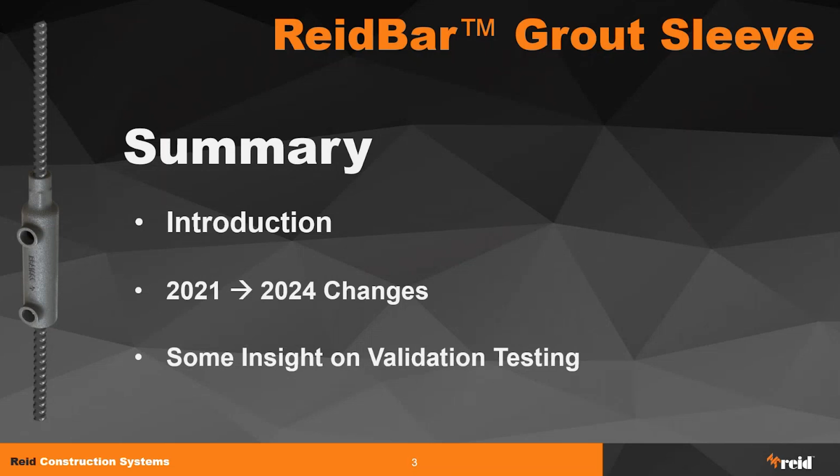First of all, what are ReidBar Grout Sleeves? ReidBar Grout Sleeves, of course, is a full strength splicing solution. It's used to connect precast panels to panels, and also precast panels to foundation slabs. And it allows for the continuity of the reinforcement, and it's a fully tested proprietary construction system for structural connections, and it's certified with a CodeMark for the compliance with the building code.

How does that work? There is a ReidBar, which is a 500E grade bar, which is connected in the neck portion of the grout sleeve, and the connection is a threaded connection with a coarse thread, which is the ReidBar thread, and the other bar goes inside the sleeve and it's connected with grouting.

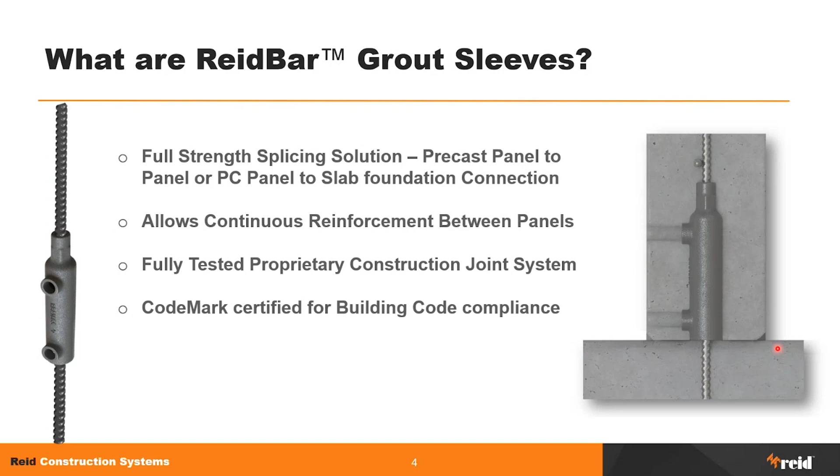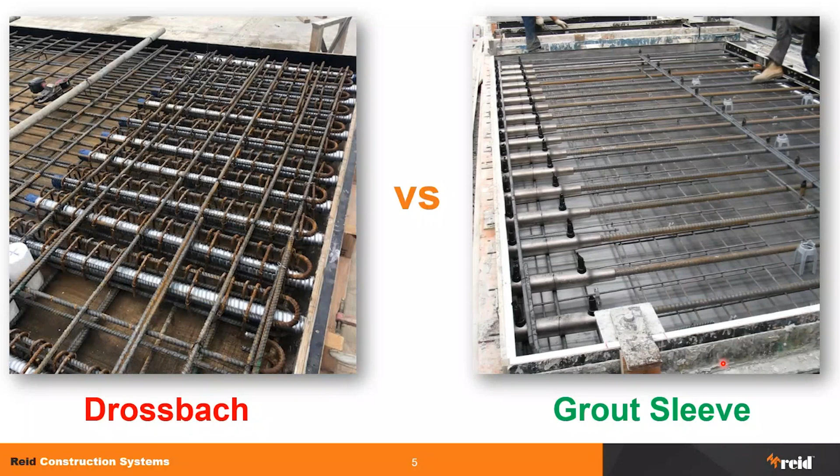So now let's move on to the next slide. So for these kind of connections in New Zealand, the two main solutions are the Drossbach and the grout sleeve to connect these panel to panel connections vertically. And although they do a similar job, that's not exactly the same job. So for the Drossbach, we are talking more like a lap splice, in particular a non-contact lap splice. For ReidBar, we can handle that as a mechanical connection, so it's like a mechanical coupler.

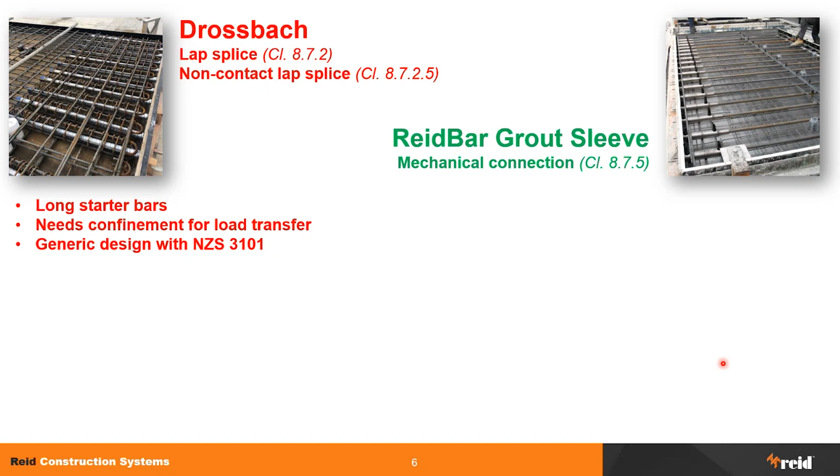For Drossbach, of course, you have long starter bars that are required for the development length, and there is a requirement for confinement to be able to have a load transfer, however the design falls within the scope of 3101, just like a lap splice.

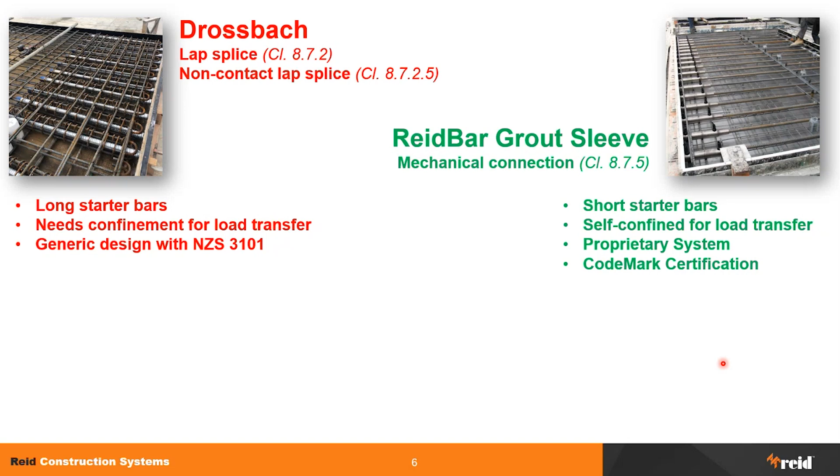For ReidBar Grout Sleeve, we have much shorter starter bars, and the system is self-confined for the load transfer. It's tested like a coupler in free air, so it doesn't need the concrete to transfer the load between the two bars. Although confinement is still a good thing to prevent spalling and cracking, the load transfer is ensured regardless. And it's a proprietary system, covered by CodeMark certification, as we mentioned before.

So for the Drossbach, if we look at 3101, when we have these kind of connections, it shall be avoided if possible in ductile regions of the panels. And if it's not possible to avoid, it needs to be staggered.

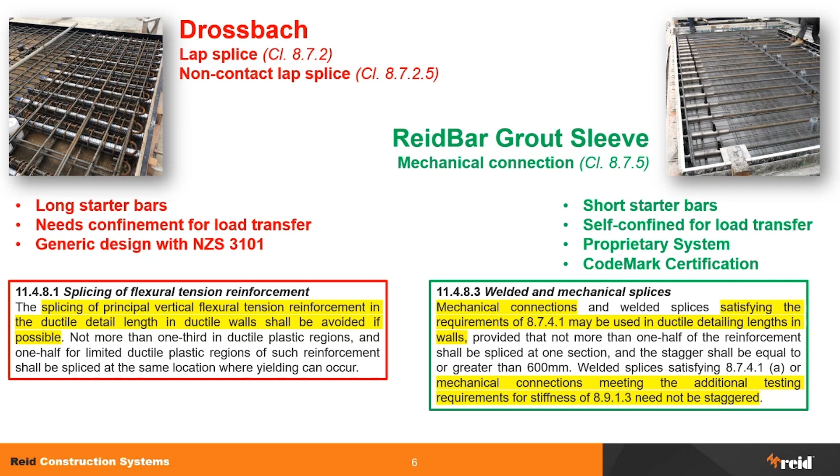For the grout sleeve, on the other hand, because it's tested as a mechanical splice, and in particular also tested to the clause point 8.9.1.3, which is referencing ISO 15835, the low cycle fatigue test, because it's tested against those requirements, it can be used also in a ductile region of a panel without the need for staggering.

Now, for the compliance with the building code, for the Drossbach, because it falls within the scope of 3101, it follows the path of the acceptable solutions verification methods.

For the grout sleeve system, because of the change that happened in 2017 in 3101, and then when it was cited in 2018 by the amendment of the building code, what happened is that the cast iron fittings are not anymore within the scope of 3101. Therefore, we had to go through this pathway of the CodeMark to be able to comply with the New Zealand building code through an alternative solution.

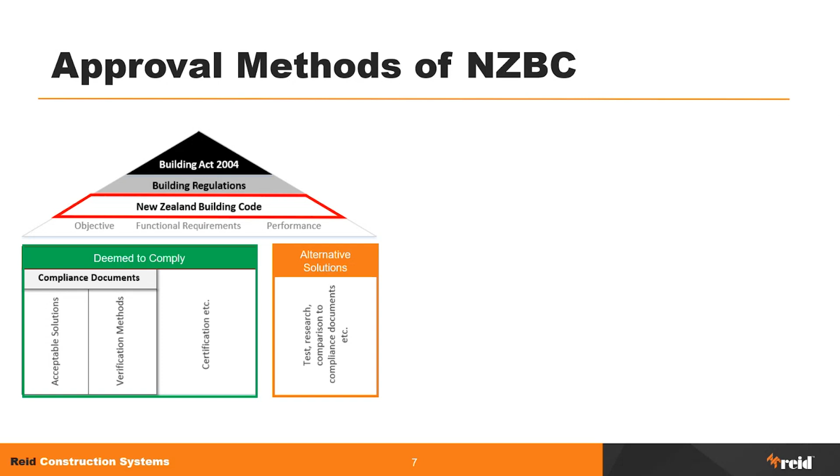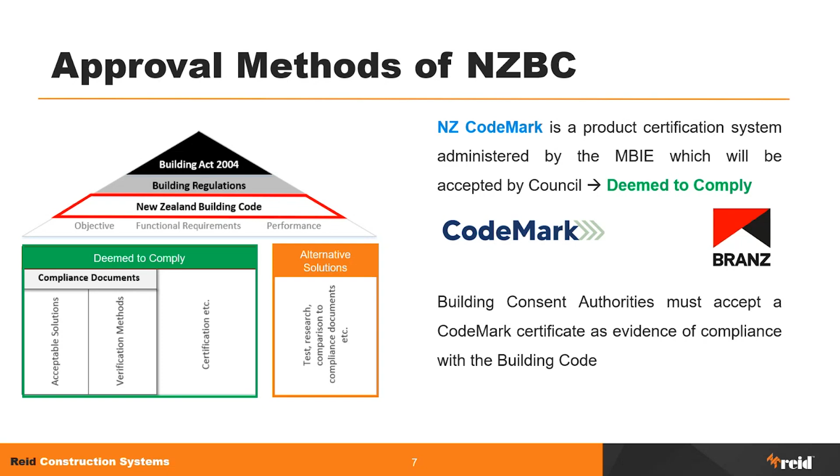But because this is a certified system, it has the advantage of being already checked by the certification body, which is BRANZ, and therefore the building consent authorities must accept the CodeMark certificate as evidence of compliance with the building code, considering that everything has been followed, because it's a strict regime.

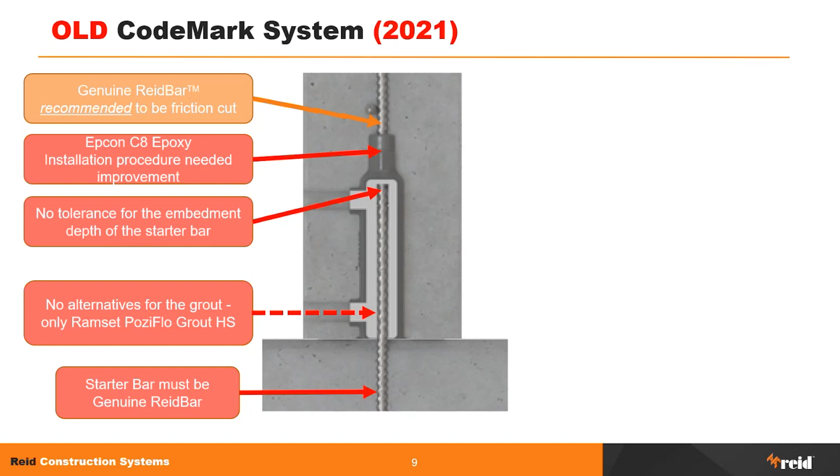So let's look at the changes that happened since 2021. All these changes are the outcome of us listening to the feedback that we received from multiple sources, from SESOC and specifying engineers, from the contractors, precasters, and also from the independent laboratory that has been testing the system. We listened to the feedback, and the outcome of these feedbacks are the changes we have implemented. Here we have a quick overview of all the changes, and then we'll deal with this in more detail.

So the first change is that now the ReidBar that is screwed inside the female thread of the grout sleeve must be friction cut to guarantee full thread engagement. The procedure to install this bar inside the thread now has an easier procedure for the installation with Epcon C8. We use Epcon C8, which is an epoxy, as a thread filler, and the procedure has been improved and simplified.

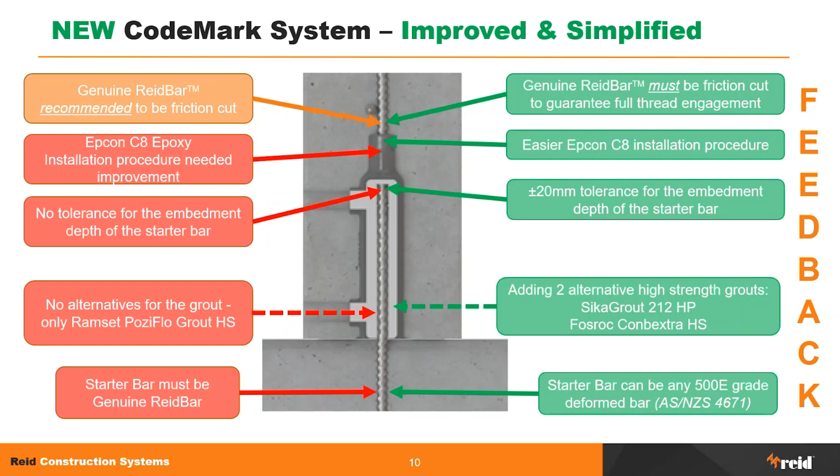Now we have introduced a tolerance range for the embedment depth of the bar inside the sleeve, plus minus 20 mil of tolerance for the starter bar. And alongside PoziFlo, which is still there, we have introduced two more grouts, one from Sika and another one from Fosroc. Lastly, the starter bar that goes inside the sleeve and is grouted can now be any 500E grade deformed bar. It doesn't need to be ReidBar as it used to be, but of course it needs to comply with AS/NZS 4671.

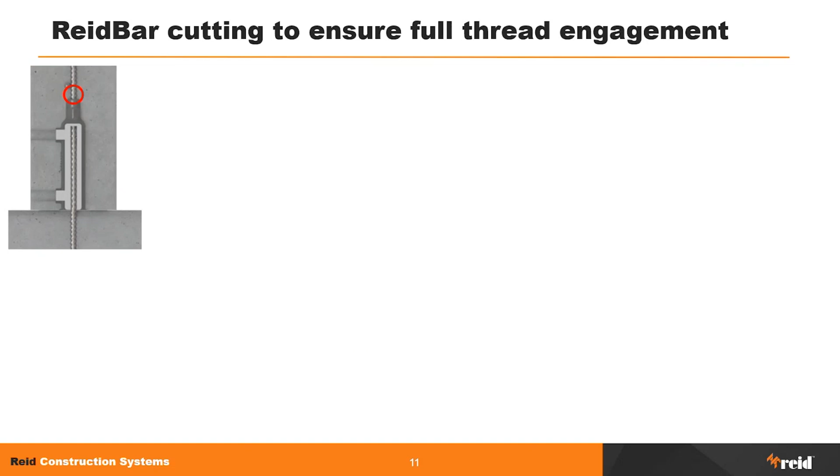So let's start with the first one, the cutting of the ReidBar that is screwed inside the neck. As I mentioned before, here also we'll mention the feedback we received, both coming from the independent laboratory, in this case Holmes Solutions, that was testing the system. They had some instances where they received the bar crop cut and installed it that way, and in some instances there wasn't a full thread engagement, resulting in thread stripping because it wasn't fully screwed inside the female thread.

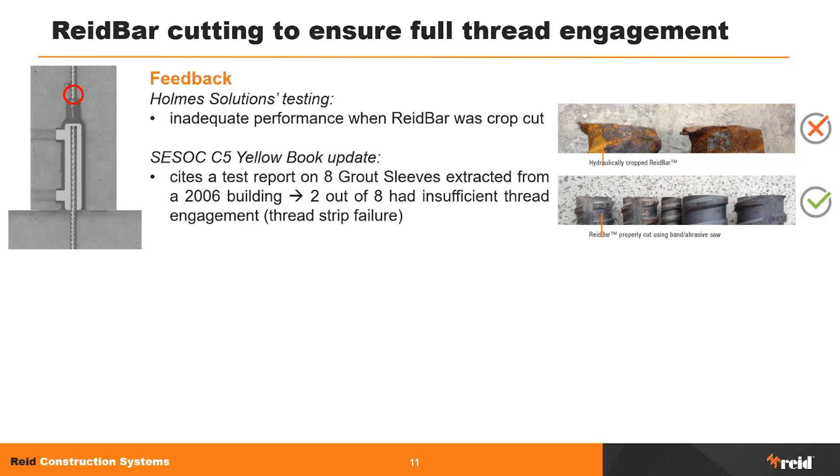Also from the SESOC C5 Yellow Book update, the update cites a report where 8 grout sleeves were extracted from an existing building designed in 2006, and 2 out of these 8 grout sleeves had insufficient thread engagement. We link this issue to what happens when the bar is hydraulically cut, cropped. There is a little kink, so the bar is slightly bent at the end, and therefore when the bar is screwed inside the female thread, it gets jammed. There is not full thread engagement.

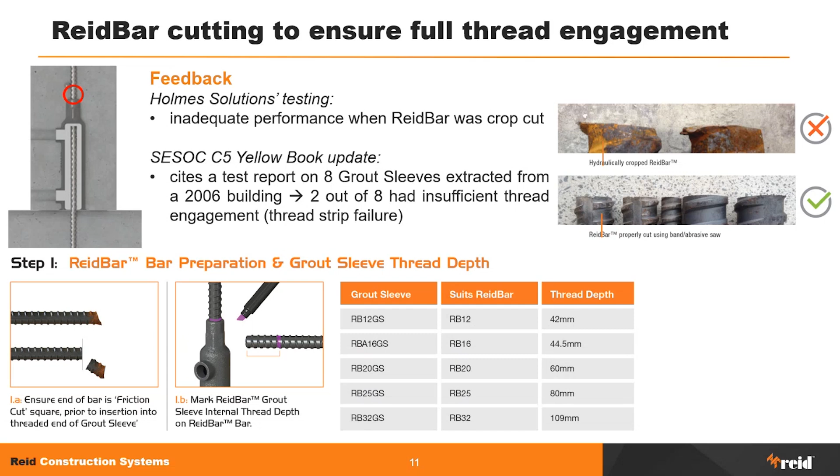So now with this new procedure, which we used to recommend as a practice, it is now actually mandatory to comply with the CodeMark. We need to cut the last bit of the bar - we're talking about a very short length, like 10 mil, not very long, but it needs to be taken off to prevent this issue. And then, as before, we need to mark the thread depth on the bar so there is a double check on the actual full thread engagement in the system.

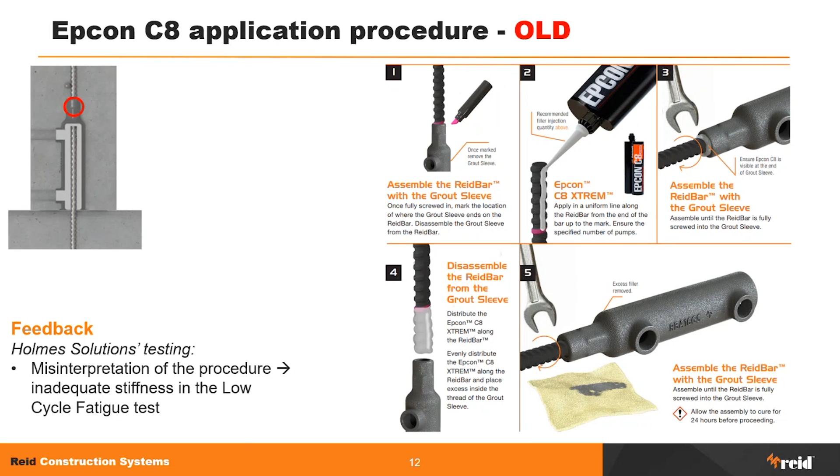Now we move on to the application of EPCON C8. Again, the feedback in this case was from the laboratory, and the procedure we had wasn't too user-friendly and might have been prone to misinterpretation, therefore ending with not enough epoxy filling the thread. Therefore, we studied a new application procedure, which is much easier.

So we kept the same number of trigger pumps, so the quantity of epoxy is still the same, but the procedure is that we put half of the quantity on the bar in the area that will be marked for the threading, and half inside the female thread on the grout sleeve. The bar is then screwed inside and tightened with a spanner, and that's all. So it's a bit cleaner and easier.

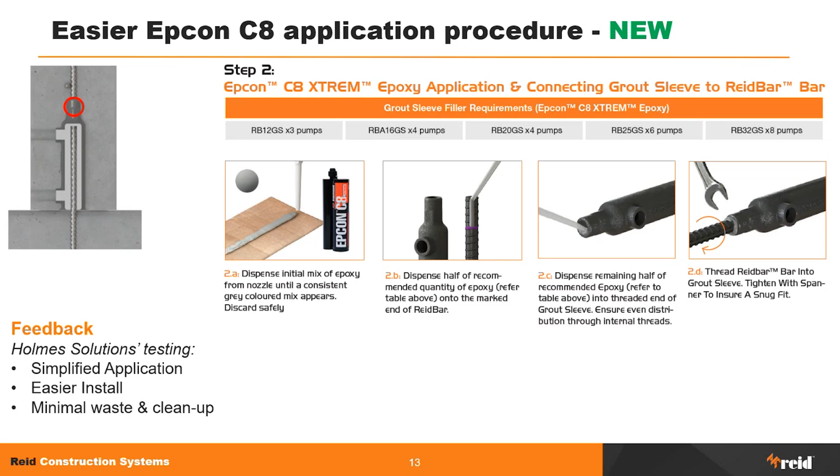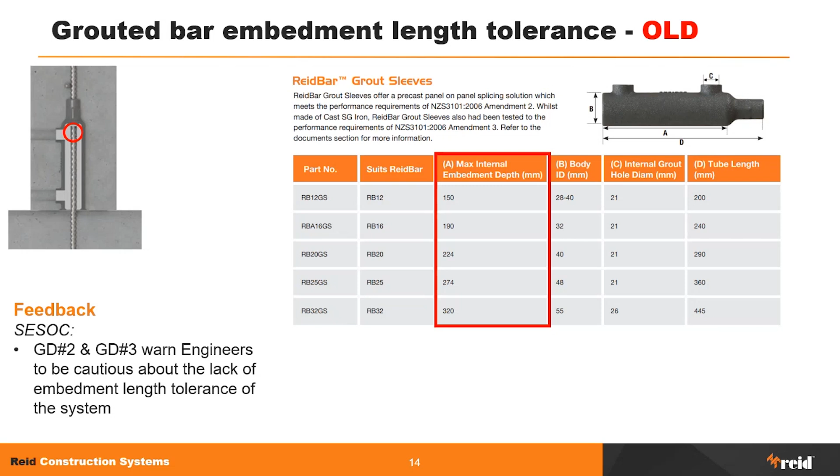Now we move on to the embedment depth. We had feedback from SESOC, in particular from the task group analyzing the grouted connections. They warned engineers that there was a lack of embedment length tolerance in the system, which was fair enough. Therefore, we have introduced a plus minus 20 mil tolerance for that, which will also be compliant with 3109.

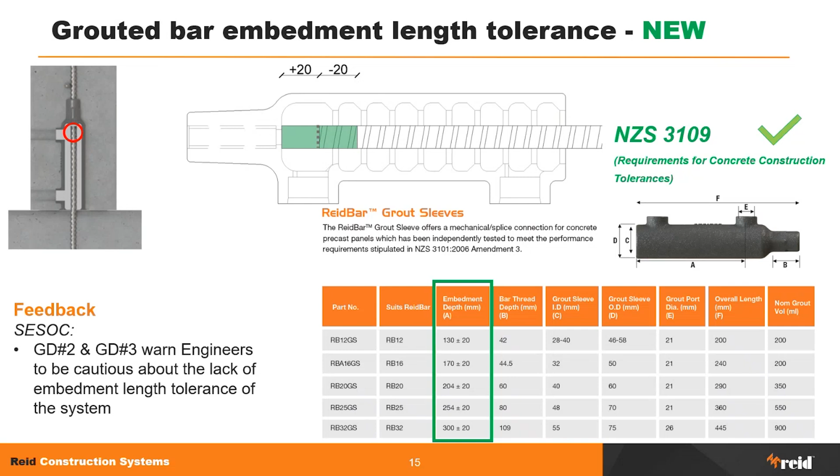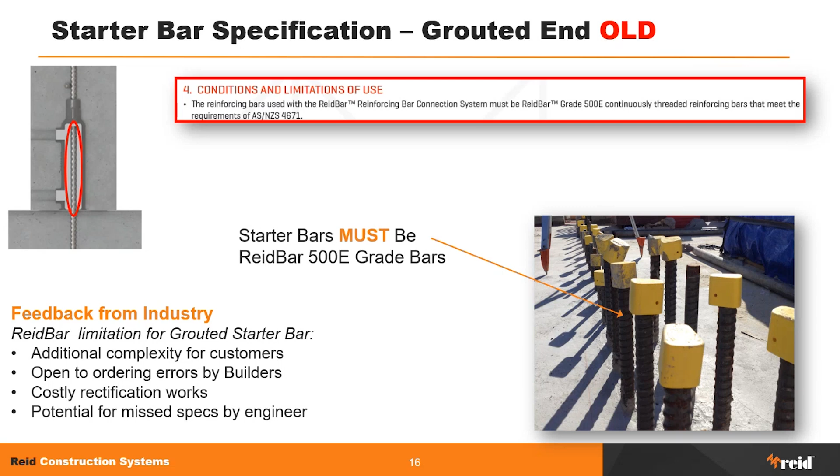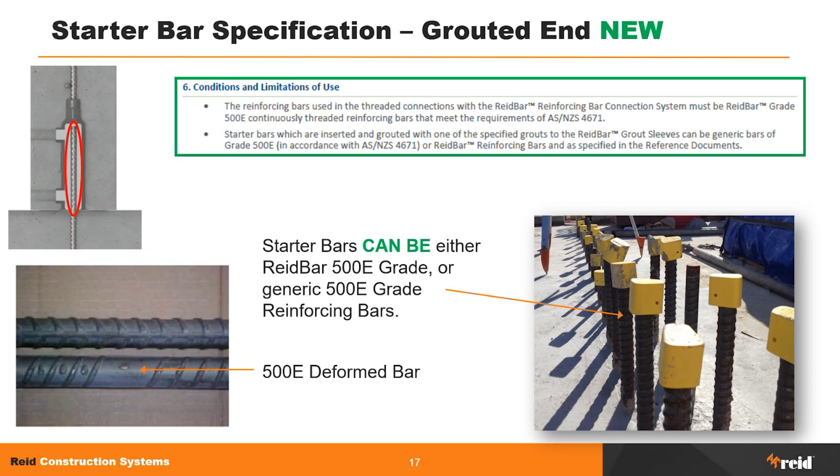We move on to the starter bars. We received feedback from contractors because sometimes the bars on site were not actually ReidBar, they were generic 500E grade bars. This issue particularly happens at the foundation, and it would be very expensive and time-consuming to substitute these bars with post-install ReidBars to comply with the CodeMark requirements, which is a prescriptive environment. So we decided to make the system more versatile, giving the possibility of using any 500E grade deformed bar, not just ReidBar, as a starter bar inside the sleeve.

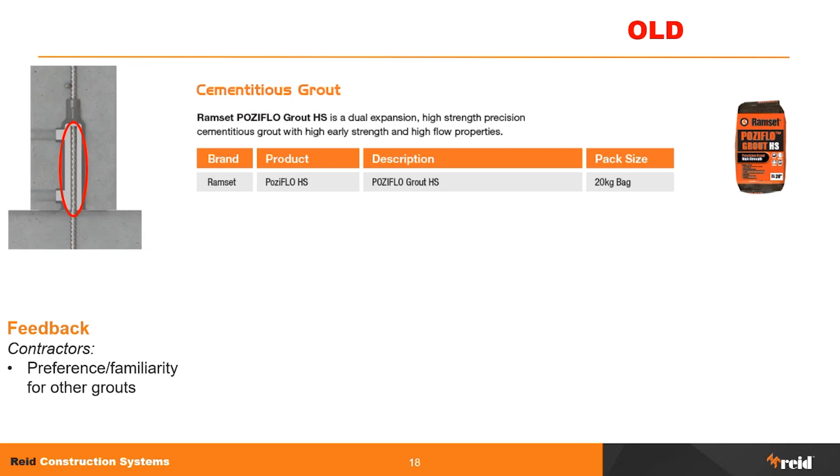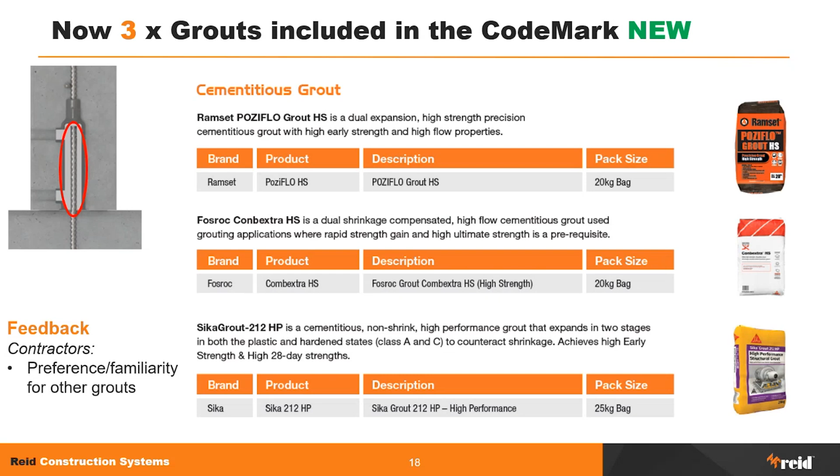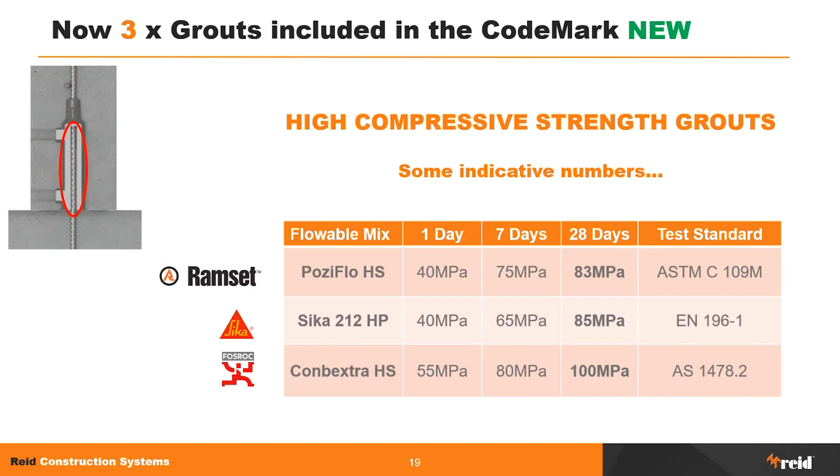We move on to the grouts. The feedback was coming from grouting contractors, some of whom have preference or familiarity with other grouts. So alongside PoziFlo Grout HS, we decided to introduce two more grouts from two popular providers, Fosroc and Sika. We now also have Fosroc Conbextra HS and Sika Grout 212 HP. What these grouts have in common is that they are high-strength grouts. It's difficult to compare apples with apples because we all tested with different standards, but we are in the ballpark of more than 80 megapascal for compressive strength.

Now I'd like to give you some insight on the validation testing and what we considered together with Holmes Solutions and BRANZ to validate the system and test for these changes. If we look, for example, at the 32 mil grout sleeve, we've introduced this new tolerance range for the embedment depth. Now the embedment depth is 300 plus minus 20. Therefore, for the test samples, we ensured the embedment depth was set to 280.

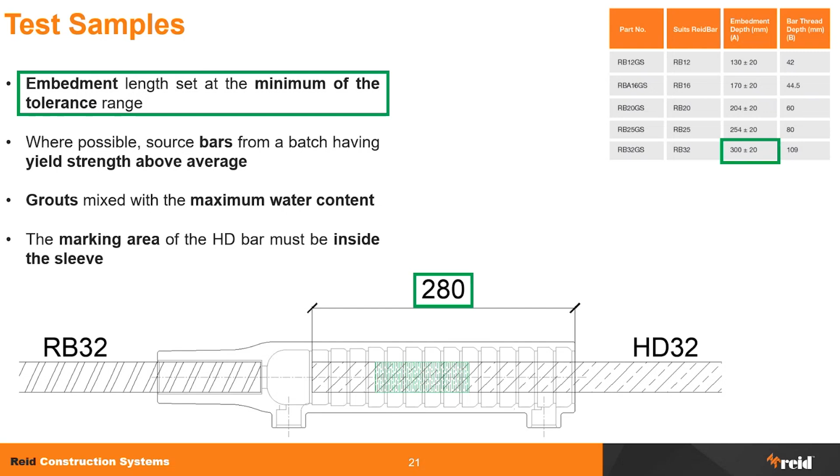Then we looked at the batches of bars we sourced. The idea was to try to get stronger bars than average, something we were inspired to do by ISO 15698, which does a similar thing. So if long-term quality data from the bar was available, we checked that the yield strength was above the mean for the long-term quality, or if not available, above 550 megapascal, which is in the middle of the range of the 500E grade bar, between 500 and 600.

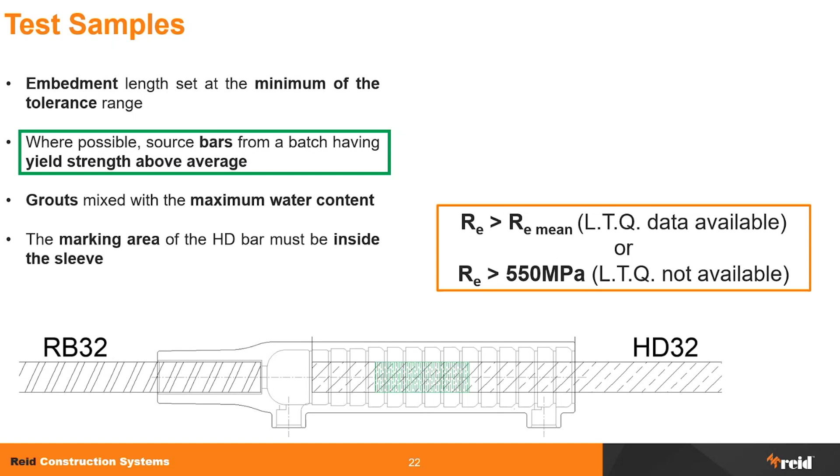Then we move on to the grouts. With these three grouts, we gave a tolerance range for the water content for mixing, and we ensured that we mixed the grout with a maximum water content within that range. I'd also like to point out that in one case we actually exceeded the water content specified by the manufacturer, which in this case was Sika.

This came with feedback from the testing laboratory, because what we asked for was not just to test the strength of the grout but also its flowability. We wanted to ensure it was easy to install and grout. The feedback was that when the Sika 212 HP was mixed with 3.5 liters, it wasn't as flowable as the other two grouts. The consideration was that if that happens on site, people might add more water. So we agreed to increase the water content to 4 liters and test it that way. The test was successful, which is why you'll find a higher water content here.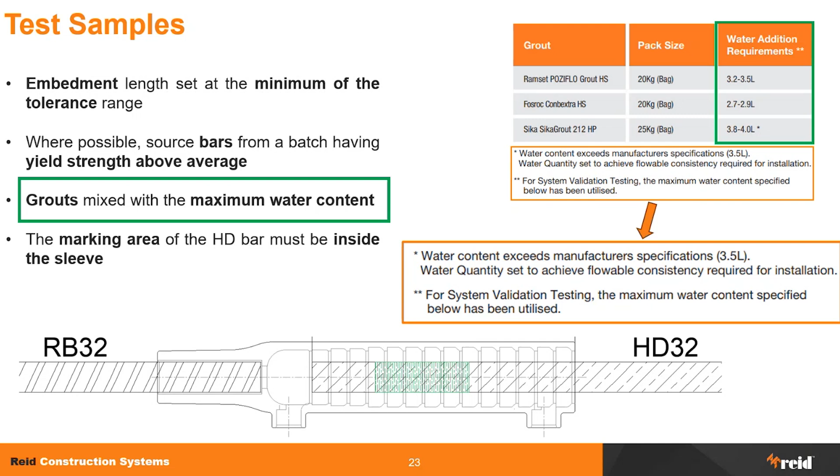Then we move on to the marking area. When discussing with BRANZ including other 500E grade deformed bars in the system, the initial pushback was that the deformations of ReidBar are more prominent compared to the deformations of other bars, specifically what's called the specific projected rib area. So we looked at other bars in the market to see what their specific projected rib area was, and it was pretty similar across them, actually a little less than ReidBar. We also noticed that for bars manufactured by Pacific Steel, coincidentally the same manufacturer as ReidBar, the marking of the 500 grade bars is missing a couple of ribs in that area.

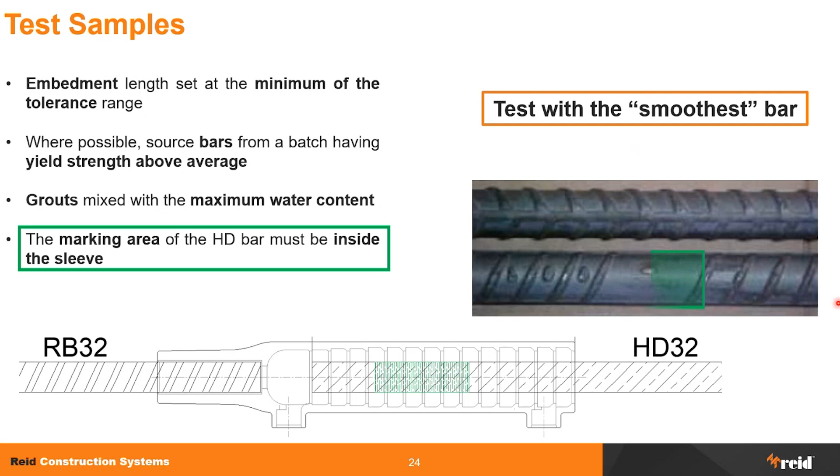So what we did was agree to test this, the smoothest portion of the bar, inside the sleeve. So we included this area inside the sleeve.

With all these, we ensured that we were testing the worst case scenario for the elongation at 0.7 FY for the low cycle fatigue, and also to demonstrate the mode of failure of the mechanical splice, where we want to achieve the ductile failure of the bar, clear of the coupler.

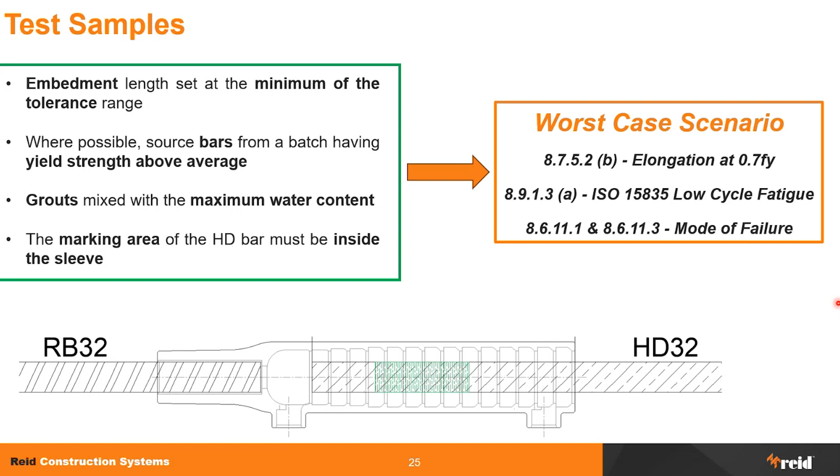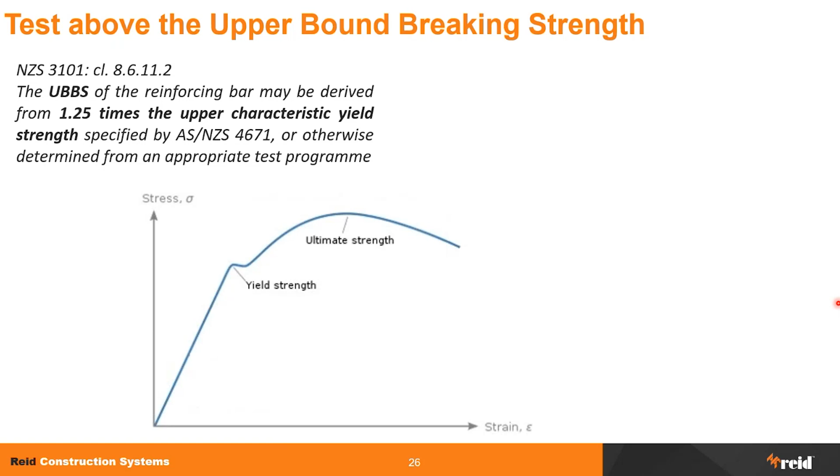Now there's another requirement unique to New Zealand: the capacity of this coupling system to develop the upper bound breaking strength of the bar. Looking at the reinforcement bar behavior required by AS NZS 4671 for a 500E grade, the lower characteristic yield strength needs to be above 500 megapascal, and the upper characteristic yield strength below 600 megapascal. Also, the ratio between the ultimate capacity and the yield needs to be between 1.15 and 1.4. So if we multiply with the yield, the ultimate in theory could be between 575 and 840. This is the full range.

But then we look at the definition of the upper bound breaking strength from 3101. If we don't have an appropriate study conducted on these bars, we can consider as upper bound breaking strength 1.25 times the upper characteristic yield strength, which is 600 for a 500E grade. Therefore, we have 750 megapascal.

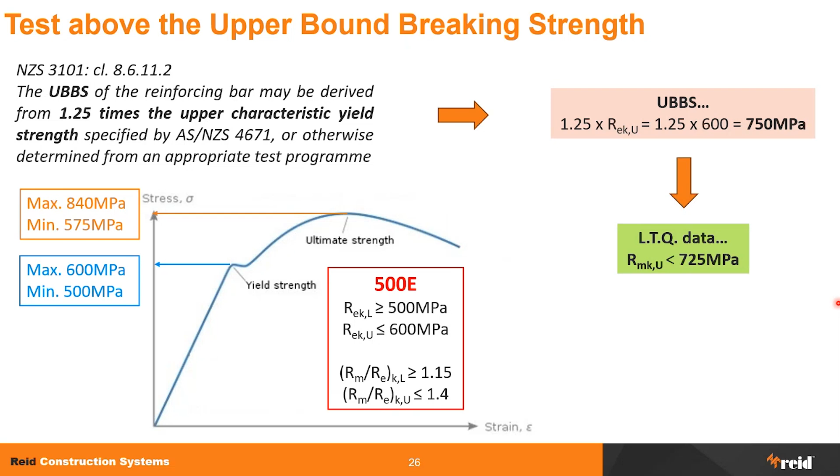So if we look at what is actually produced by Pacific Steel, for example, we can see that the upper characteristic ultimate strength never goes beyond 725 megapascal. So how do we test for this performance, and how do we get the bar? Even if we want to source a bar that's 720-something megapascal, this only happens once every few years. It's not something that happens every day, so it's not that easy and practical. Not to talk about 750 MPa, which is never the case. So how do we do it?

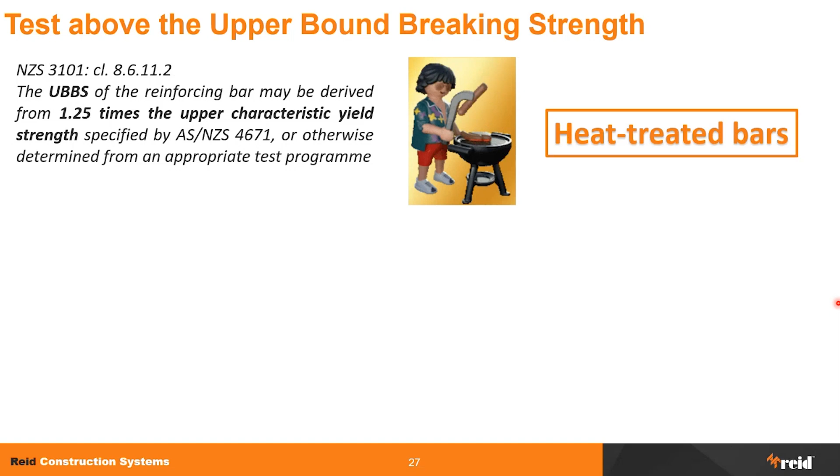The trick that we have adopted is to cook the bars. So we heat treat the bars. This allows us to bring the bar to an ultimate strength that can be anywhere between 800 megapascal and 1100 megapascal. It's not very consistent, but it's consistently above the threshold of 750, so it does the job. Just to give you an example, here are some random results that we had.

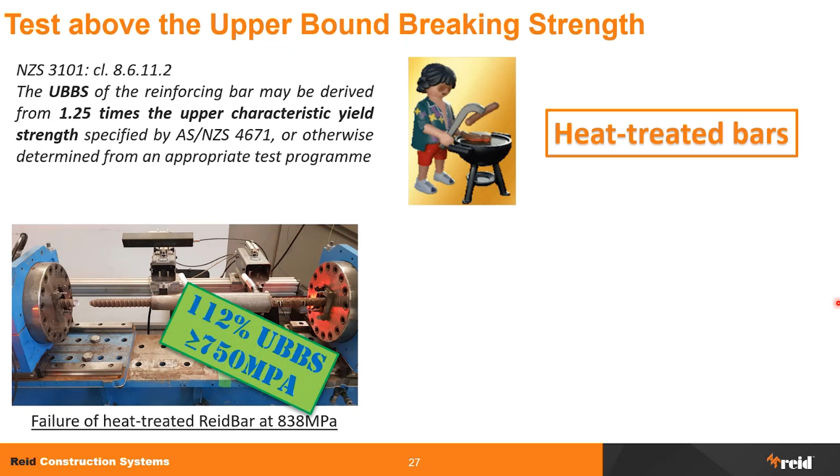In this case, for example, we still didn't manage to break the fitting. The idea with this test is to try to break the grout sleeve or pull out the bar, not to break the bar, but it still happens. In this case, it was at 838 megapascal of stress on the bar, which is 112% of the upper bound breaking strength, so all good.

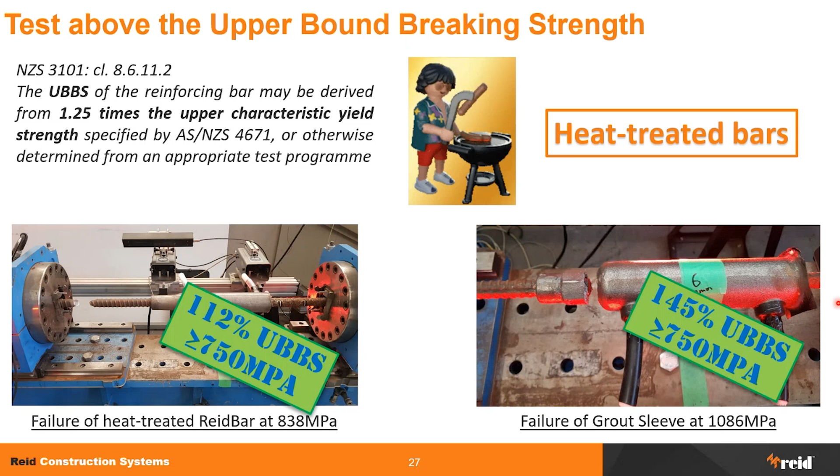And in this case, we managed to break the grout sleeve, and it happened at a stress in the bar of 1086 megapascal, which is 145% of the upper bound breaking strength, well above what's required. So happy days.

Another topic I'd like to cover is brittle fracture resistance. This is actually the clause that drove us to reach out for a CodeMark, specifically the prescriptive requirement of anchors not being manufactured from cast iron. The same applies to couplers through clause 8.6.5.2a. Aside from this prescriptive requirement, there are testing requirements to prove that these systems possess resistance to brittle fracture at service temperature, for which they are intended for use.

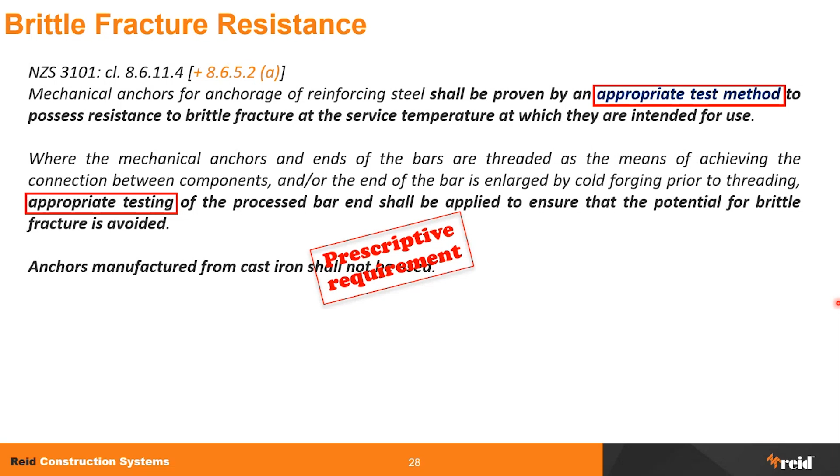In particular, the concern might be low temperature. The problem is that 3101 doesn't give guidance on what is an appropriate test method, not even in the commentary. Also AS 3600, or even international standards like ISO 15835, a standard for testing couplers also cited by 3101, and ISO 15698, a standard for testing headed anchors of reinforcement bars, which is cited by the bridge manual.

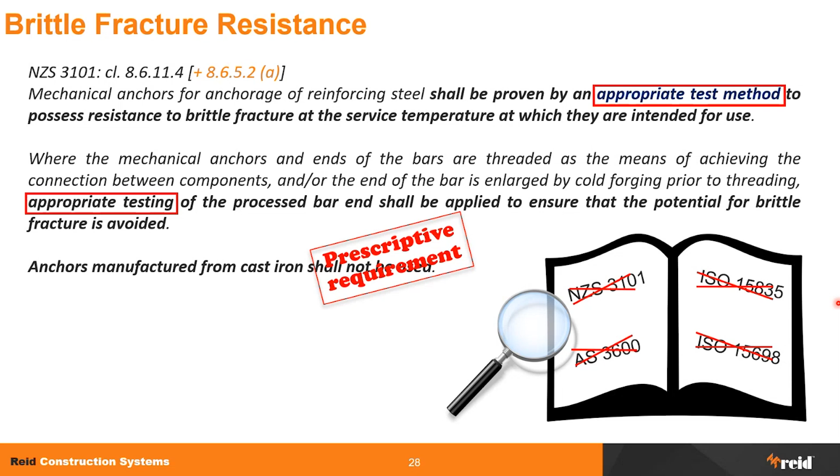They don't actually cover the testing against brittle fracture resistance of the couplers or fittings. So the point here is that if we accept to check just the material and not the mechanical splice as a whole, which would be more interesting, then the NZTA bridge manual advises to

perform the Charpy V-notch impact test at 0 degrees. How it works is that a little sample is cut out from the coupler when it's possible. Of course, it depends on how big the coupler is. If the coupler is small, that might be very difficult. The standard measure of the sample is 10 by 10 by 55.

And then there is a little incision cut in the middle, and then this element is frozen to 0 degrees, and there is this pendulum that strikes the sample, and depending on how resilient the sample is, it absorbs energy from the impact, and so the pendulum doesn't swing too high after the impact.

And the thing is that this is a test on the material, not on the actual element, and also not on the actual connection. So we don't know what happens inside the threads and all the rest, particularly when there is a system, which is not the case for our system, but when the thread needs to be cut from the bar with some cold forging or something like that, that might compromise the ductility. And so this is a test which is suitable for steel, but is not actually fit for purpose for spheroidal graphite iron because of its nodular composition.

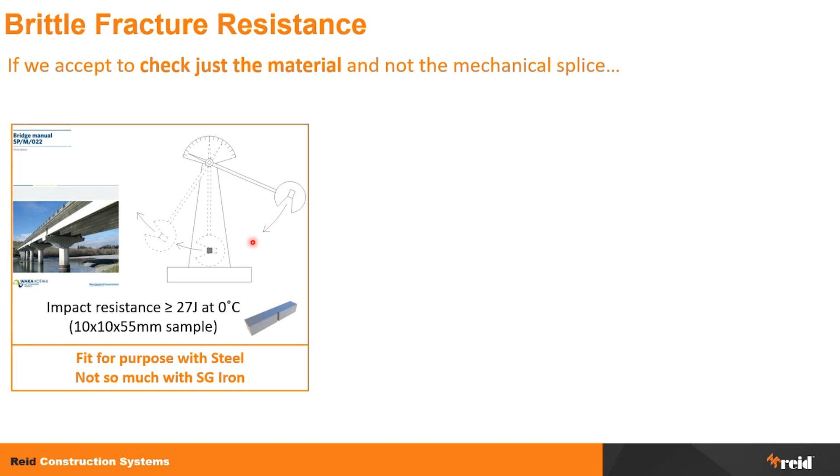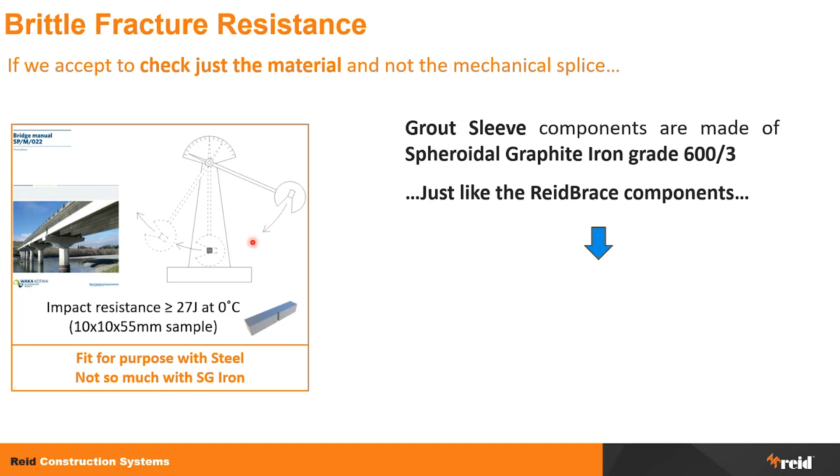So how we handle this is that we consider that the fittings like grout sleeve are made from spheroidal graphite iron grade 600/3, and Reid brace components, they're also manufactured by Ramset now, Ramset Reid. Reid brace are made of the same material, exactly the same grade. And this system, the Reid brace system, was

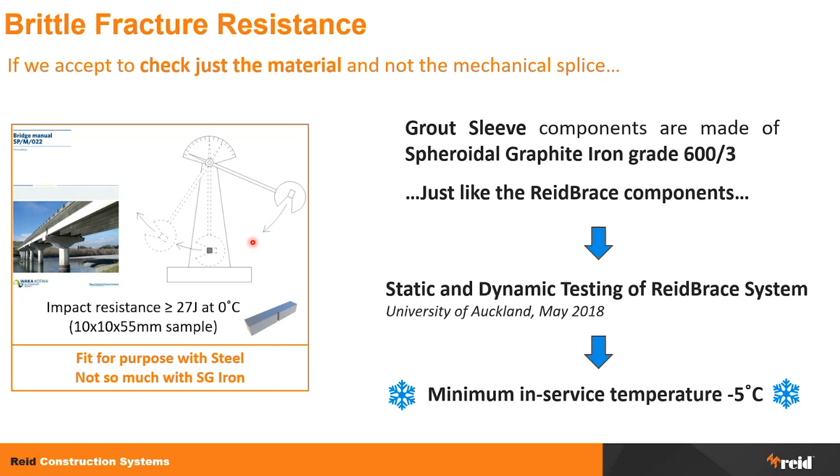extensively tested by the University of Auckland in 2018. It was subject to static and dynamic testing, and also to impact loading at freezing temperature of the components. And the outcome of these tests was that the minimum in-service temperature for the system would be suitable as -5 degrees Celsius. This is, of course, if we are fine just checking the material.

The ideal thing would be, if we can go above and beyond, to test the whole thing. And so that's why we reached out to Des Bull, and together we came up with a possible test procedure, and we presented that at the Concrete Conference last year. And so watch this space for the future.

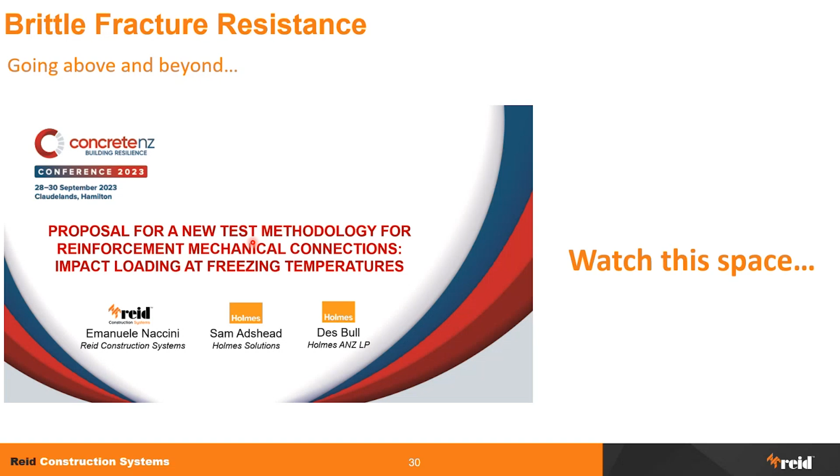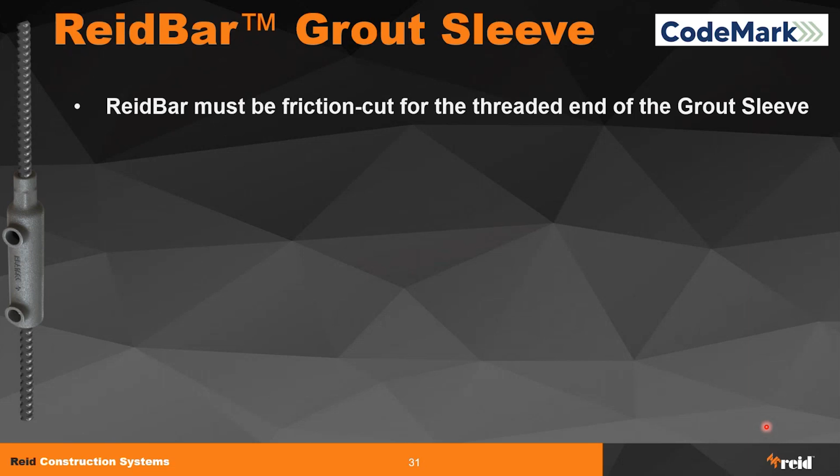Just to recap, what are the changes that we have introduced with this new CodeMark in 2024? Now we have the ReidBar that goes inside the threaded end of grout sleeve, which must be friction cut. We have changed the application procedure of EPCON C8, which is now easier. And we have introduced a tolerance for the embedment depth of the starter bar with plus minus 20 millimeters. And the starter bar can now be any 500E grade deformed bar, of course, compliant with AS NZS 4671.

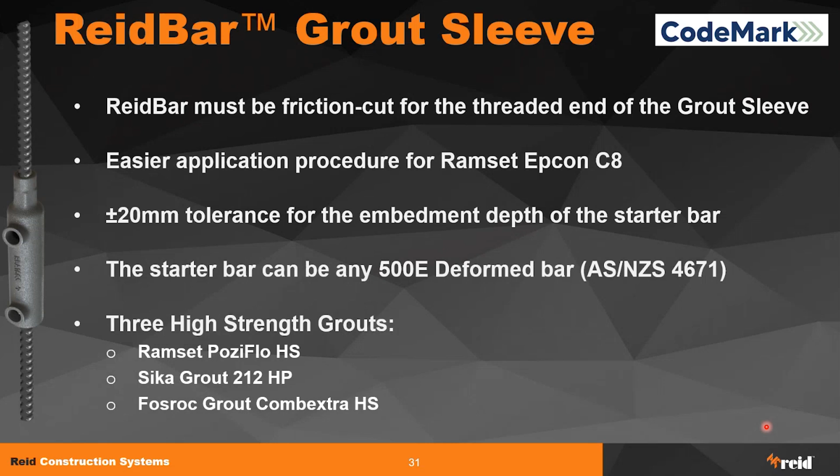And now we have 3 high-strength grouts available for the system: Ramset PoziFlo HS, Sika Grout 212 HP, and Fosroc Grout Combextra HS. And so now I'll open the floor for questions. Thank you very much.